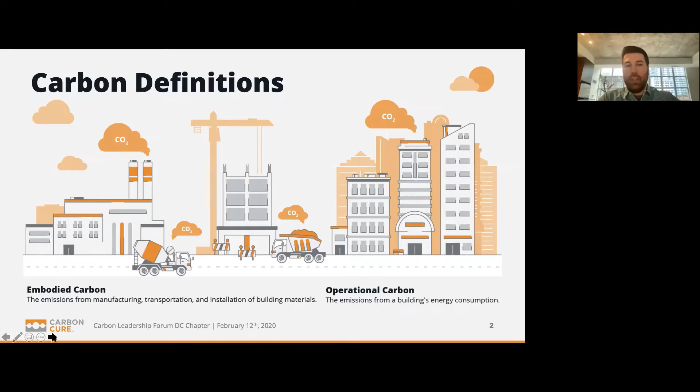So it's the same thing when we look at construction. Before anybody actually occupies a new house, there's going to be emissions from wood, from concrete, from steel, from glass, whatever materials went into that. So as I talk about this today, just think about that it's really talking about not things that you're using, but things that are being used to construct something.

And when you look at global emissions, and you talked about those 80 key strategies, when you look at the actual pie slice of where emissions come from in any given year, it might surprise you to find out that as much as 10 or 11% of all emissions on any annual basis are coming from just purely the manufacturing of construction materials. So steel, concrete, glass, plastic, wood, all of that industry of making new living spaces is as much as 10 or 11% of all emissions in any given year.

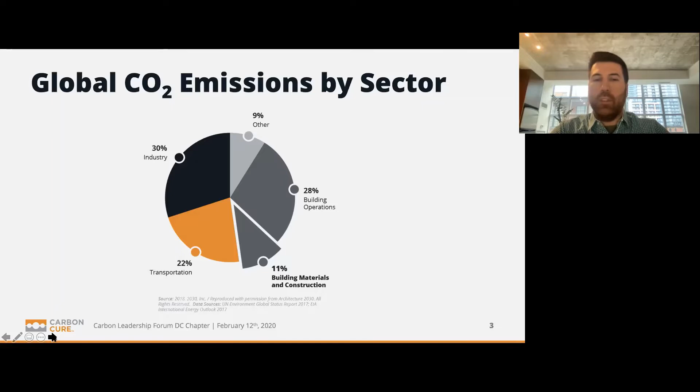So it's quite high. And it's also, again, probably the pie slice you hear the least about. You usually hear about electric vehicles, you hear about solar energy, you hear about industrial emissions and oil and gas, but you probably didn't know that when we talk about steel and concrete and issues like that, it's a pretty large percentage of the pie.

Additionally, as many of you will know, in some of the cities I heard you rhyming off, Dallas and Fort Worth and all of those places, we have seen a lot of construction, and we're going to keep seeing more construction as time goes on. So there's an estimate out that we're going to be seeing basically the equivalent of New York City be constructed in new buildings every month for the next 40 years across the globe. So as somebody who is very environmentally minded, that is distressing for a lot of reasons.

But also what you can imagine is that as we have a growing population and we have more people living in cities, a lot of this construction is going to not be single family homes, it's going to be multi-story towers. And as part of that, getting down to the real topic of tonight, which is the concrete and cement world, you may not actually know this, but concrete and cement is the most abundant man-made material anywhere on the planet. So after water, you are most likely to encounter concrete wherever you go around the world.

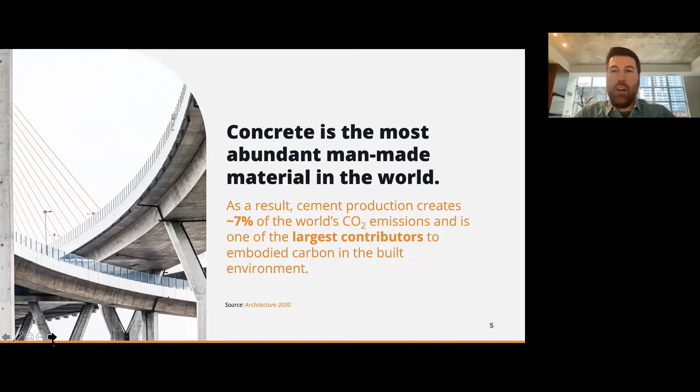And we don't really think about it a lot because it is kind of in the background of our lives. If you walk down the street and actually start to look around and pay attention to what's there, the majority of the built environment is concrete. It's sidewalks, it's parking lots, it is buildings, it is dams, it is highways. And part of that is just that concrete is really a fantastic material and you can make it anywhere because all you need is some rocks, some cement, and some water and you're good to go. And that makes it really popular and it makes it really effective.

But as a result of that popularity, it makes up about 7% of annual emissions in and of itself. And for any given building, it is probably the largest or second largest contributor of materials-based emissions. The only exception to that would obviously be like a single family home, which is typically wood-based.

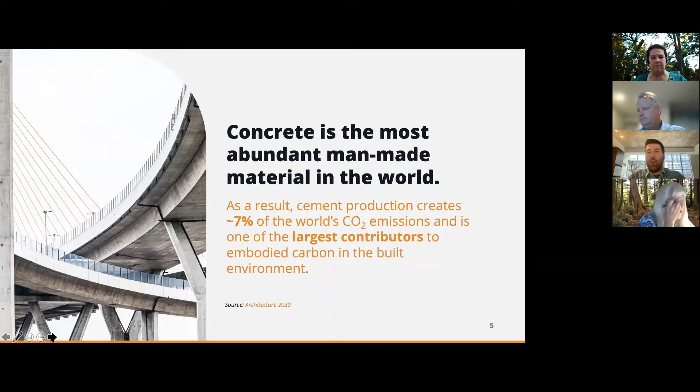So how is concrete made? Well, we go out into the environment and we dig up limestone deposits typically. And so you see those open pit type mines where they are basically digging these deposits out of the earth. And the limestone itself, historically, is living matter that's been compressed. So you're looking at limestone, which has a chemical formula of calcium carbonate, and we dig all of that up. That ends up going to a cement processing facility or a cement kiln.

So if you've ever driven by one of these, they're typically really long, tall towers that have a bunch of conveyor belts around them. And they're typically always associated with this giant plume of smoke coming out of them. And that is where limestone material, that rock material, is being heated up, basically burning it under pressure, and that releases CO2. Once you have cement, then you can make concrete.

So one easy analogy here, if you've not spent much time thinking about concrete, is that you can think of it a lot like a cake. So there are many different kinds of cakes you can make. There are many different kinds of concrete. And the key ingredient, however, is always the same. And that ingredient in our case with concrete, that ingredient is cement. So you need cement for all types of concrete, but you can have many different types of concrete.

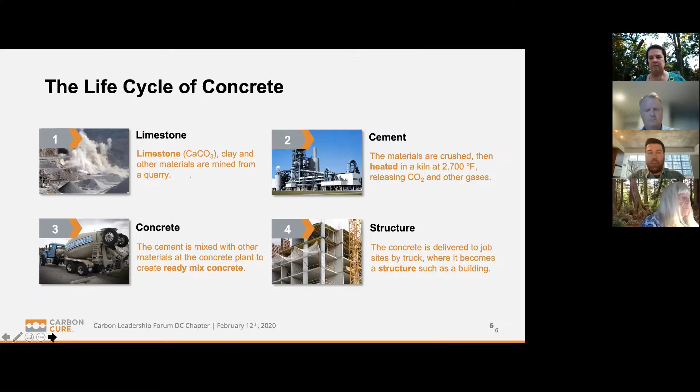So that's typically where we're most familiar with it, is those concrete trucks you would see driving on the road. And once you have the concrete there, you can then build whatever you're looking to build with that product. So concrete is actually made up of mostly rock, sand, gravel, quarried stone, things like that. This image is showing you the breakdown of what goes into concrete production.

And as you can see here, about 60 to 75% is just basically inert, crushed up stone. 10 to 15% is the cement, or that active ingredient. And then about another 14 to 20% is water. And there's a small amount of air that's in there as well. However, when you compare that to the actual environmental impact of the materials, about 90% of the emissions impact of concrete is actually coming from that small slice of cement. That 10 to 15% of the mass is 90% of the overall impact.

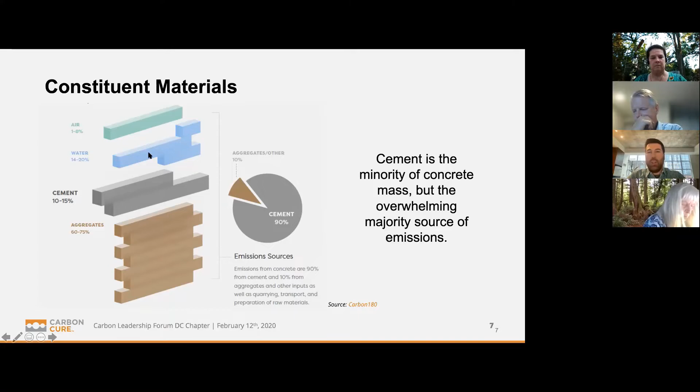So that means that if you really want to understand issues around decarbonizing this material, you're really talking about decarbonizing cement, since it's such a majority of the emissions in the product. And that's just restated there. This is the process, and I'm not going to bore you with the details, but as you can see, this is the process of making that product.

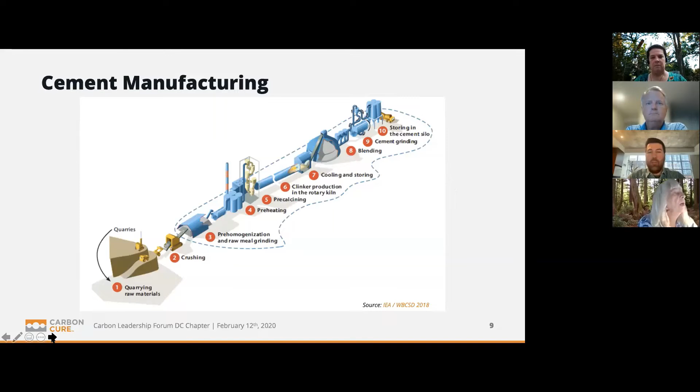It is very industrial. It requires a lot of mechanical labor, and it creates a lot of emissions, and it goes through a number of different steps in order to get to the end product. So it is not that simple. It is complicated, but it also, you can see here, has a number of steps involved.

So now getting to the key challenge with this sector, which is, why can't we just solve our emissions problem with something like cement, like we've started to solve for other industries? And one of the key challenges in this sector, which doesn't exist for other sectors, is that you really can't just change your power source and hope that will solve the problem.

So if you in your own home choose to install solar panels or choose to install wind turbines or other sources of renewable energy, and you then electrify everything in your house so that it's all running off of that power, you could get to a fairly low impact pretty quickly. Unfortunately, for the cement production industry, that's not really possible. And the reason for that is twofold.

So even if you ran all of this process on green electricity, you would still always be producing CO2 from the process itself. So that's a key thing to understand. Much like oil and gas refining, when you make the product, you are invariably creating CO2. And when it comes to cement, what that means is that for every pound, every ton of cement that you make, you're typically making about 0.9 tons of CO2 at the same time. So almost a pound for pound equivalent.

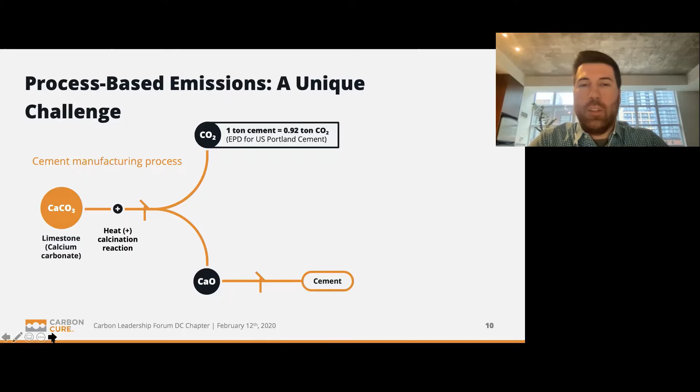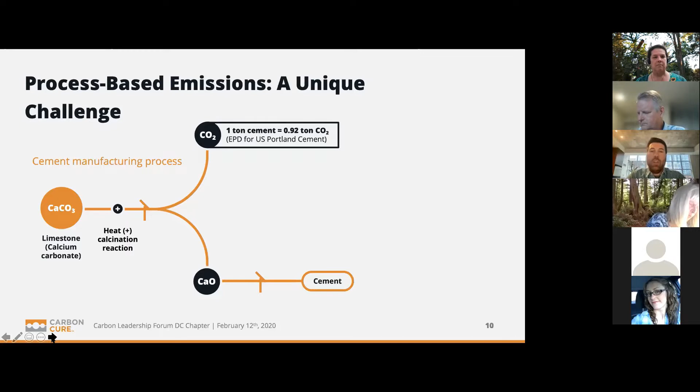So for every pound or every ton of cement that you buy or that you lead to being purchased because of the buildings you design or choose to build, you're creating that impact into the environment just from the material itself. And again, once you have cement, you can make concrete.

Unfortunately, that makes concrete sound very bad. It makes it sound not so great, like it has a lot of problems. Unfortunately, this is not just a matter or a question of switching from one material to another. You cannot replace concrete and cement just with timber or just with steel.

There are a lot of reasons for that, and one of them should be pretty obvious, which is that you're probably not going to walk on a steel sidewalk. You're probably not going to dam a river using wood. Concrete, again, is pretty unique in those properties. But similarly, there's also actually not an environmental benefit in terms of some of these other materials either. So it's not a question of just swapping things out here.

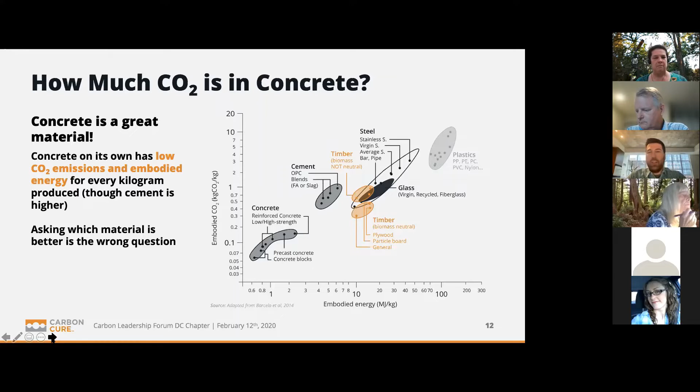We need to do something about all of our industries. And you mentioned those 80 kind of strategies. There's probably hundreds or thousands of strategies we have to do across our entire economy in order to decarbonize. And I'm just talking about concrete and cement here, but there's obviously other issues or strategies for other industries as well.

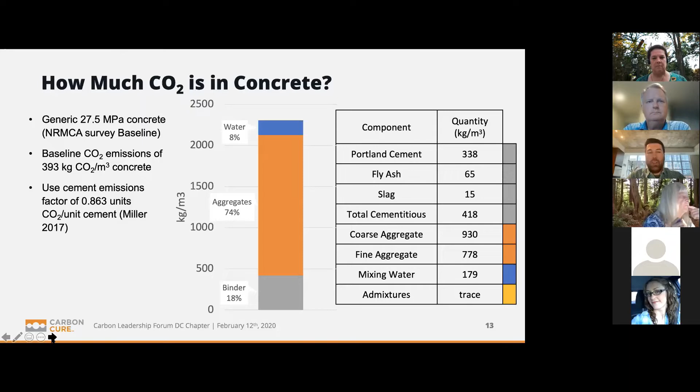So it makes a lot. It's a big impact. That's affected by all sorts of things. So if you are buying concrete just for your backyard, that's going to have a lower impact than concrete you would use to build a 20-story building. So it's not actually very easy to estimate an average for all different concrete products. They all have different impacts.

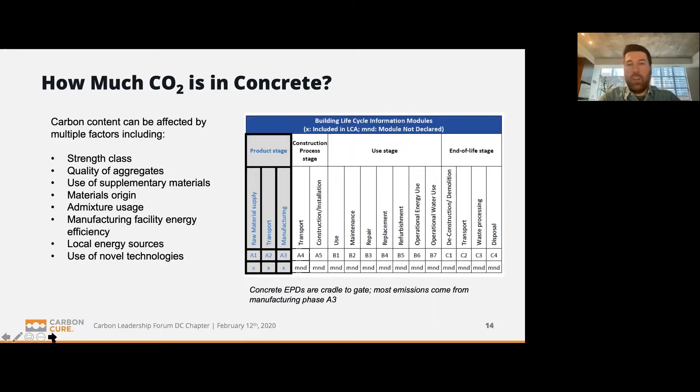It depends on a lot of factors like where you buy things from, what your local power grid is like, what types of technologies are being used to make that concrete, where those materials came from. So just be aware that there's lots of different influences on that actual number. So I'm going to start veering more towards the policy, or the what can we do about this issue topic, pretty shortly.

But the first thing I'm going to point out here is, until tonight, did you ever think about low carbon concrete? Or did you ever think about the carbon impact of concrete at all? Doris is nodding, I know she has, but my assumption is many of you have likely never thought too deeply about this topic. And if I were to ask you, what is low carbon concrete, or what is a lower carbon option out there, would you have any idea? My guess is very likely no, right?

And that's not uncommon. My parents still refer to those trucks as cement trucks, which is very wrong, but it's very common. It's not something we spend a lot of time thinking about. But I would also point out that until a couple of years ago, if you went to the grocery store and wanted to know which type of milk is healthier for me, or has a better environmental footprint, would you have had any way to do that either? Until very recently, the answer was also no.

Now, as you know, if you go to the grocery store, you can look at different products and find out from the information labels on the back how many calories they have, how much sugar, whether they are oat milk or soy milk or whole milk or skim milk or whatever. There's a bunch of information there for you to make a choice for your own personal benefit. A similar movement is underway in building construction materials categories.

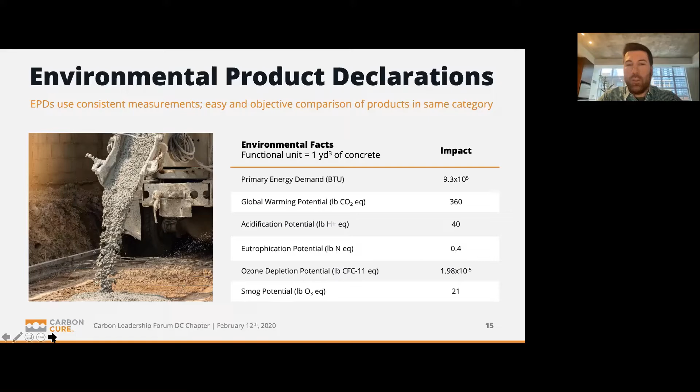So if you really want to change this industry, I hope what you can understand from this is that we have to really do something as a society, as a culture, talking to our elected officials and directing them to this issue. You cannot, as an individual, go out and change this industry by asking for better products. What we really need here is a decision, a choice from the overall civil society to do something different.

And what we do know is that when governments do act in this area, it has an immediate impact because, again, you cannot afford to alienate your biggest customers. So pressure for more sustainable and climate-friendly choices in this industry is going to really have an effect if it comes from the government.

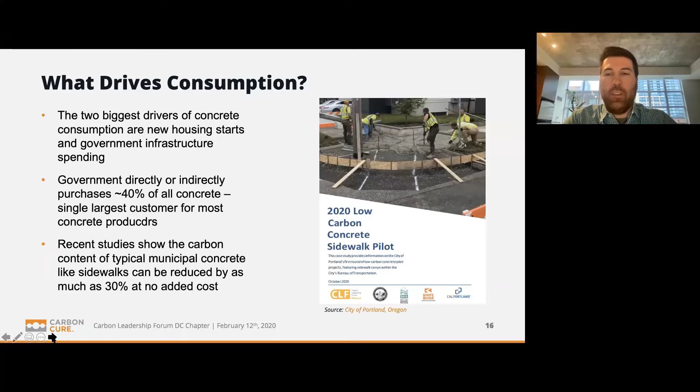And some work that's been done here already is showing, and this is a study coming from Portland, Oregon, that you can actually find strategies to reduce the impact of these products by as much as 30% without costing the public a single penny. And this is, again, a pretty low-hanging fruit item that you can do in a way that is affordable and that does not have negative impacts. And all it takes is some intentional thinking and some political pressure.

So knowing that impact and knowing where things stand, what can we actually do to decarbonize the product? Luke spoke a little bit about technology and his experience. And I think one thing that you should keep an eye on over the next couple of years is that this industry is going to undergo a fairly rapid transformation. It's being driven by the evolution of technology, and by pressure from the climate side of the equation to do something better.

So I'm going to go through a couple of things and strategies here. I'm not going to dwell on this, but I wanted to give you a sense. And I heard one of you saying you're an investor in this space, so hopefully this is helpful to you from that perspective as well in terms of where this industry needs to go. When you look at overall decarbonization targets for the year 2050, for this industry to achieve the decarbonization required, there are basically 4 strategies that could be used.

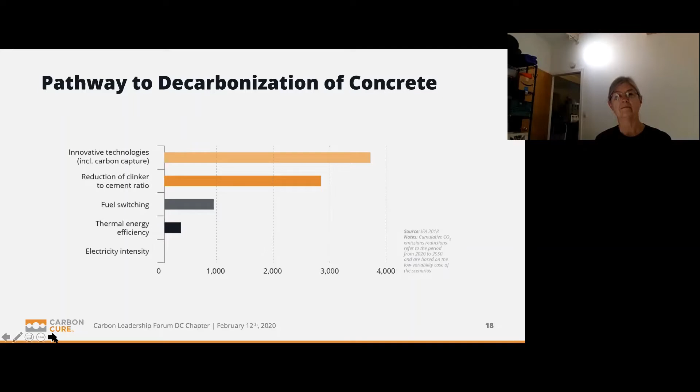One of them, on the second one down, you're going to see that called clinker to cement ratio. The easy way to think about that is that there are materials that act like cement, but which don't have the same impact as cement. And the way I think of that one is kind of like the Splenda of the concrete world. It's like, I like sugar. I like things that have sugar in them, but I don't like what it does to me. So what I can do is I can have this synthetic version that tastes the same, acts the same, but doesn't put me at risk of illness or that sort of thing. It's the same thing in concrete: this version of cement is basically kind of like a filler that doesn't have the same negative effects.

The top one is the one that Luke and I spend most of our time thinking about, which is what we would call carbon capture and utilization. And that's the idea that we can actually take CO2, which we know is problematic and harmful, and actually use it to make products that we value as a society. So that's a key thing I hope you take away from this presentation, is that for the longest time, for as long as I've been alive at least, the conversation has been around: CO2 is waste, it is garbage. We don't like it, but there's also no value to it. So why would we bother trying to capture it or do something with it? Basically, if we want to do efforts to fight climate change, that's just going to be a net cost to business, and that's viewed very negatively.

What's starting to happen in the concrete and cement world is that there's actually a lot of evidence that they can take CO2 as a product and use it as an ingredient in manufacturing. And that makes it have some value. And that could hopefully use economic forces to actually drive that reduction in the industry.

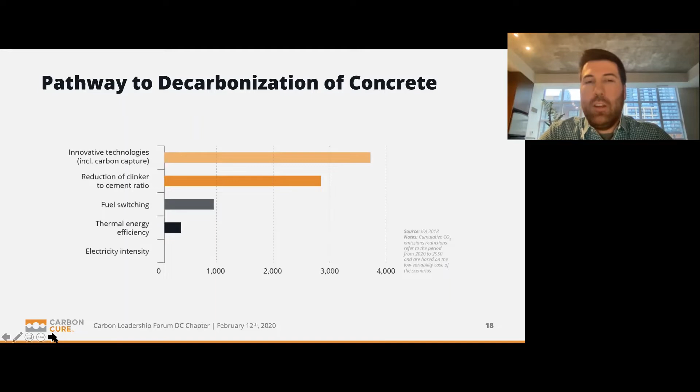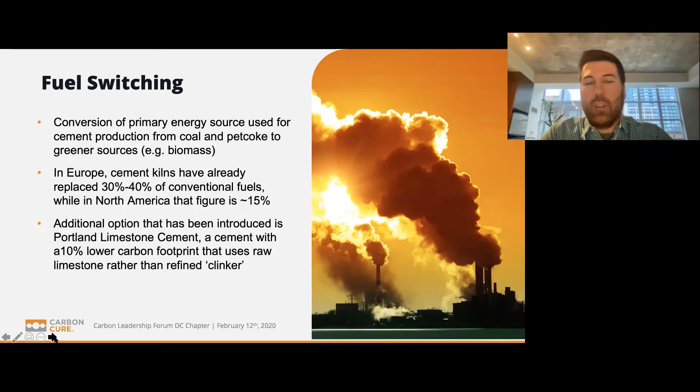So looking at each of those strategies in succession here, the first one of fuel switching is basically just switching away from coal towards things like biomass. And in Europe, we know that cement kilns are already able to change about 30 to 40% of their fuel sources away from coal and towards more renewable sources of energy. In North America, we're at less than half of what Europe has done. So again, there is a precedent there that could be copied in North America. There are also other options for cement. There's a kind that's called Portland limestone, which basically uses other filler as well to reduce the carbon impact by about 10%. So that's one strategy.

The other strategy you might hear about is basically, again, that kind of Splenda strategy, I would call it, which is finding alternatives to cement. And what you can see here is that there are materials that have chemical properties that act a lot like cement. So things like fly ash, which is a waste debris from coal plants, which normally is just buried underground, can actually have cement-like properties, and it's used very commonly. There's other materials that are wastes from silicon manufacturing and wastes from steel manufacturing. And also, really interestingly, there's this one here you can see called waste glass. That's actually ground up glass bottles that are coming from recycling facilities. So you can actually take this ground glass, it's a very fine powder, and also put that into concrete if it can't be recycled any other way. So all of those things offer opportunity.

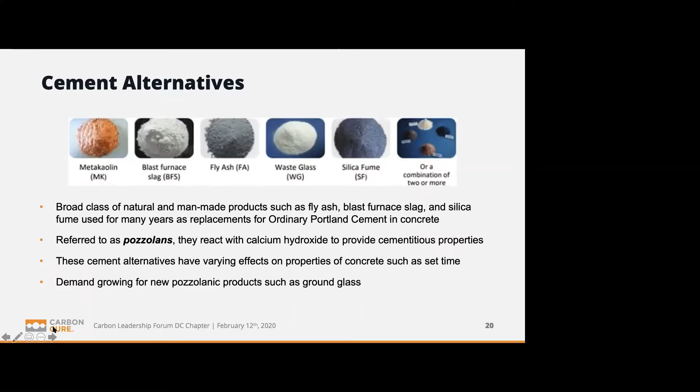If you go back way in time, you think of ancient Rome, their concrete that they used to build things like aqueducts was actually coming from volcanic soil. It's coming from different materials that are naturally found in the environment. And so you can also find those things and use them to some extent as well. And we know that concrete, again, has been around more than 2,000 years, using basically the same process that whole time. So those are just some other alternatives that could exist, and it's going to be a really important part of the puzzle.

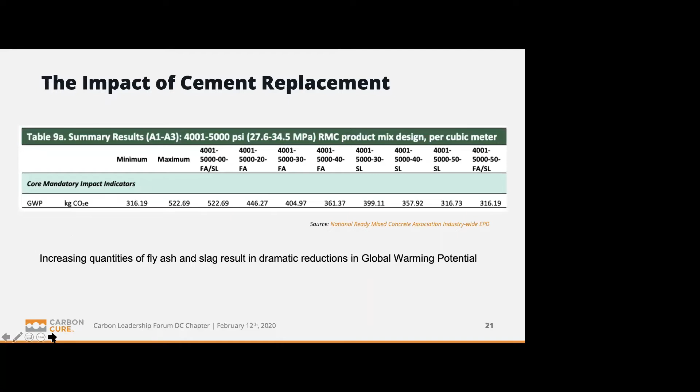When you look at the impact of that, and again, this is fairly scientific, but you can see here on the left-hand side, for typical concrete that you might see used on a residential basis, the average impact on the environment is something like 300 to 500 kilograms of CO2. When you look on the right-hand side, you're seeing increasing percentages of replacements of cement, and you're seeing those numbers decline pretty substantially.

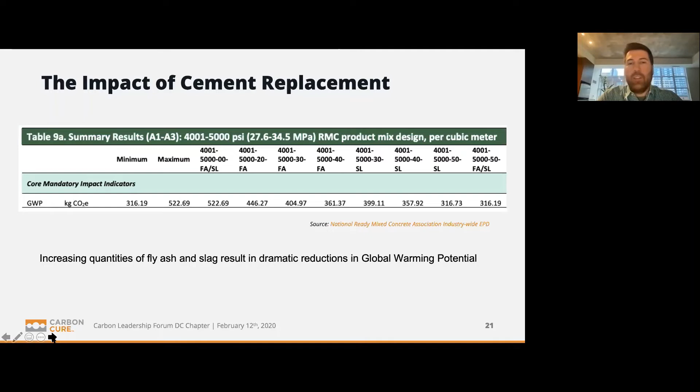So that's just showing you, again, kind of the scientific proof that that does have a beneficial impact. So looking at this kind of carbon capture, utilization, storage idea, what does that actually mean? And for those of you in Texas, you might be more familiar with this because you often hear about this from the oil and gas industry, where they talk about just basically capturing CO2 and pumping it underground into these storage aquifers where they just hope or model that it's never going to come out again.

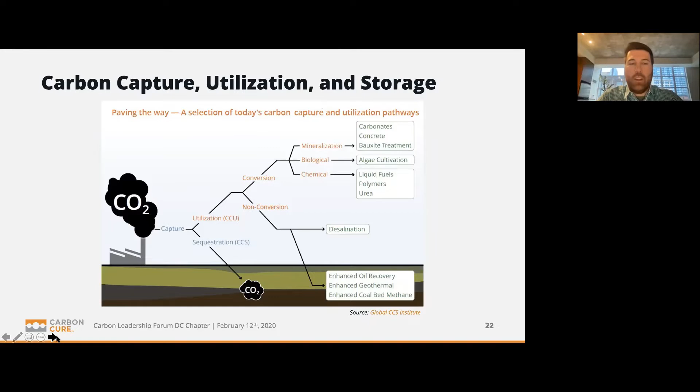And that's the really cool thing, is that you can actually take CO2 from industrial sources where you can't find a way to eliminate it any other way, and you can take it and add it to concrete and actually make concrete that way. So all that being said, where does the public sector play a role, and how can we all as individuals influence how that decarbonization of this industry can happen? Again, if we're talking 7% of annual emissions from one industry, we need to do something about that, and we need to do it pretty quickly. And so there is a role for this to play.

And Doris at the beginning highlighted some specific members from specific states that we're looking at. And the reason for that is that, fortunately, this conversation is already starting to play out. And so if you are somebody who lives in New York or New Jersey or California or Colorado, your representatives have actually already proposed legislation that is specific to the idea of low carbon concrete materials. Some of them I'm going to list here towards the end of the presentation. So if you are members of those states, I'd encourage you to take a look at that legislation and consider talking to your representatives about it, just again, because they need to understand that there is interest in this issue.

But what you're starting to see is that the spotlight is starting to shine onto this industry, and they're starting to be under some significant pressure from elected officials to do something different. And specifically in New York and New Jersey, the efforts are most advanced. And what those states are doing is they are directing their state agencies to require lower carbon concrete for use on public projects. So when the Department of Transportation builds a bridge in the future, they're going to be forced to preferentially choose lower carbon sources of materials. And that's really exciting because, again, if the government is controlling at least 40% of procurement of this material, they will single-handedly change the reality of the industry overnight in those states when those rules come into place.

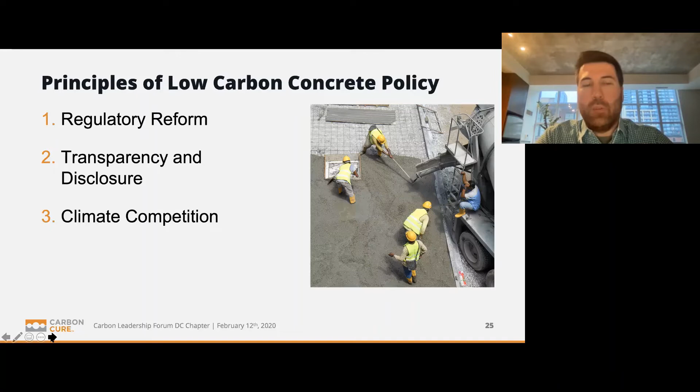The final item is a really interesting one, and I hope that this is a model that you will see in other industries as well, which is what I'm going to call climate competition, and I'll explain that here in a moment. But regulatory reform, again, I don't want to dwell on this, but basically whenever concrete is purchased by the public sector, it's like going back to that cake analogy.

It's like if I went down to the bakery and I said, I want to buy a chocolate cake, and I give them the recipe that I hand wrote myself. And I said, I want you to make me this cake and do not make any changes to it whatsoever. And I want this cake and give it to me. That's what I want. That is how the public sector thinks about concrete.

So when they go out to the industry, they say, make me concrete, make it this way and put this much cement in it. And that's exactly what I want. And if you vary from that, not only will I be unhappy, I will actually also probably sue you. So that's a problem because those standards are very backward looking because they're based on engineering kind of data from the last 40, 50 years.

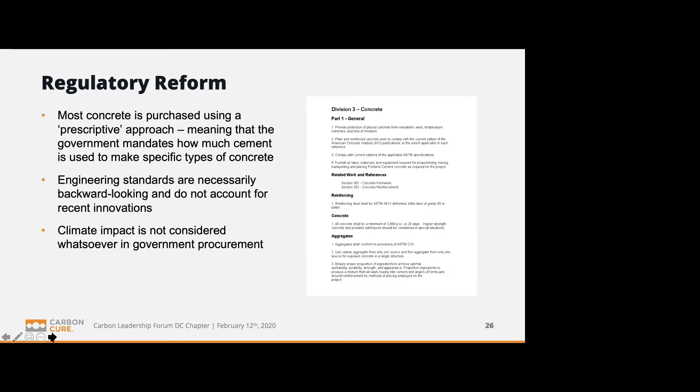Some of these standards have not been rewritten since the 1980s. So, they're very static. They do not actually consider climate, and they don't also consider technology or innovations that have happened since that was written. So that's a big issue, boring, but it does exist as a problem.

The second one, again, is this transparency issue, which is that if we don't actually require the public sector to track and report how much impact they are having by buying materials, then there's no way for it to possibly improve. And so the purpose of this really is, again, to understand what is the baseline of the impact of construction materials and where will we go forward from that and how will we do better.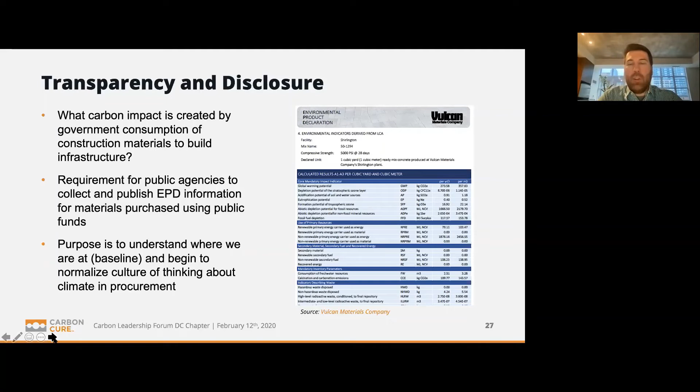And again, it's about normalizing this culture where climate matters when you buy things rather than just thinking about it in terms of low cost. So just as all of us are thinking about things like, do you want to buy a product just because it's cheap? Or do you want to buy a product because it has some social good as part of that? This is the same concept, is that we need to understand the other impacts that affect our decision-making for purchasing.

The final one is the most complicated of all, and I don't want to, again, dwell on this too much, but the concept here is basically, if I know there are better products out there, and I know that they have value that goes beyond just financial value, I should probably find a way to factor that into my decision-making for purchasing. So the model that New Jersey and New York have proposed effectively gives concrete producers who offer lower carbon products an advantage in the selection process for state government projects.

So think of it this way, is that if I went into this bidding process, or I wanted to supply concrete to build a bridge in New York City, and Doris is my competitor, and she has a lower carbon product than I do, and we're offering the same performance capability, but her product has lower impact on carbon, she would receive a discount on the price that she quotes.

So if she quoted a price of $100 and I quoted a price of $98, under what New Jersey has proposed, her bid would be considered to actually be valued at $95 and therefore would be considered the best value for the government. And then her bid would be selected over mine. So this is getting really technical, but the key thing here to understand is that it gives an advantage to people who have actually done something to improve the performance of their product from a climate perspective.

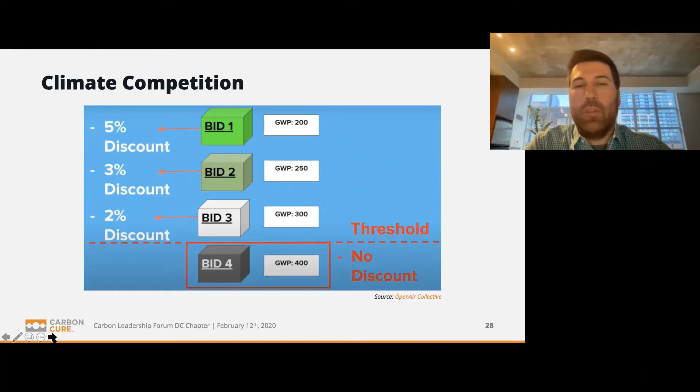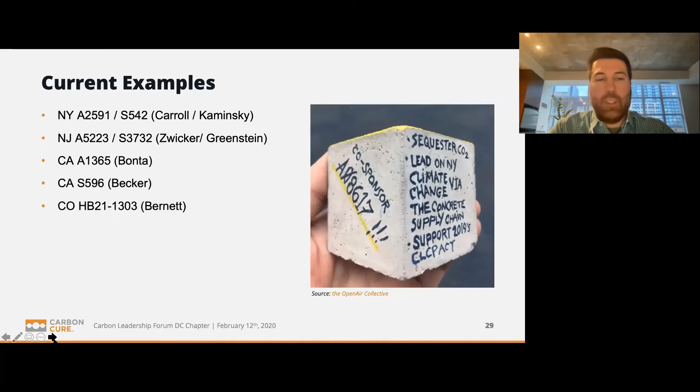But each of these assembly members and senators is proposing legislation, again, that could be active very shortly that would actually drive innovation in this sector. So they're all listed there. And again, if anyone has any questions on that, I'm happy to dig into those specifically. So a couple of final thoughts I wanted to leave you with, and basically it's kind of like, why now?

You know, why should this matter to you? Where does it rank on the scale of importance of issues? Well, the importance of this issue actually just rocketed up the charts pretty quickly. And that happened basically on November 3rd, when now we have a new administration that is talking about infrastructure investment in order to stimulate the economy.

And so that is, in classic Washington, D.C. fashion, has been called the American Jobs Plan, because I guess they think that's really marketable. But they're talking about spending as much as $2 trillion on infrastructure. And when you hear the word infrastructure, what you're really hearing is steel, concrete, cement, that kind of stuff. Infrastructure isn't just jobs or this kind of hypothetical. It's mostly just stuff we put into the ground.

And that's not to say that infrastructure investment isn't necessary or important. It absolutely is. And we have not been doing a good job of maintaining our infrastructure. So this is by no means a bad idea. It's a fantastic idea. But the key thing here is when you hear the phrase build back better, that doesn't just mean doing more infrastructure or fixing things that are a problem. We need to think about building back truly better, which means building back differently and making different choices about how we actually choose to do this.

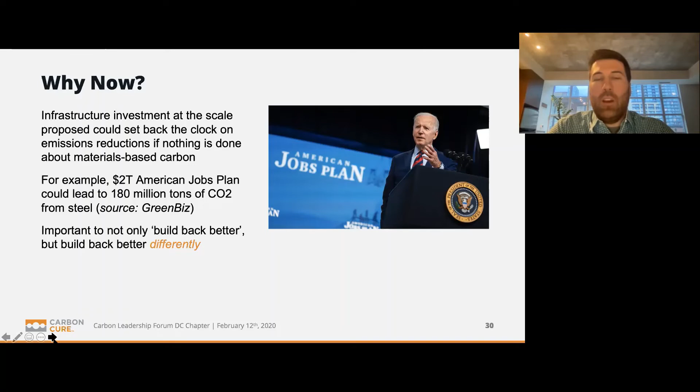So all that being said, I'm going to stop there. I hope I didn't hit you too hard with a lot of different concepts. I did see there were a lot of messages coming through the chat. So I'm happy to end there, Doris, and move over to some Q&A here.

Thank you, Eric. Awesome. You have taken a very complex subject and turned it into something very understandable. And I so appreciate that. And I love the Splenda example. That's just excellent.

All right, so I'm trying to switch the view. And it's not switching, but that's fine. So let's see, we have about 12 minutes before the hour. We're going to do a little bit of Q&A. I'm going to take the right of the facilitator, and I'm just going to throw out all my stuff, and you can answer it as other questions come through.

So, I want to comment on the infrastructure bill for UU Social Justice. I'm one of the people that brings your letters to your state and Senate representatives. So you will be hearing from UUSJ. We will be lobbying and advocating for smarter things in the infrastructure bill. This is one of them. Stay tuned and please participate. And when we go out and visit your representatives, join us on those Zoom calls. They want to hear from you, the constituents.